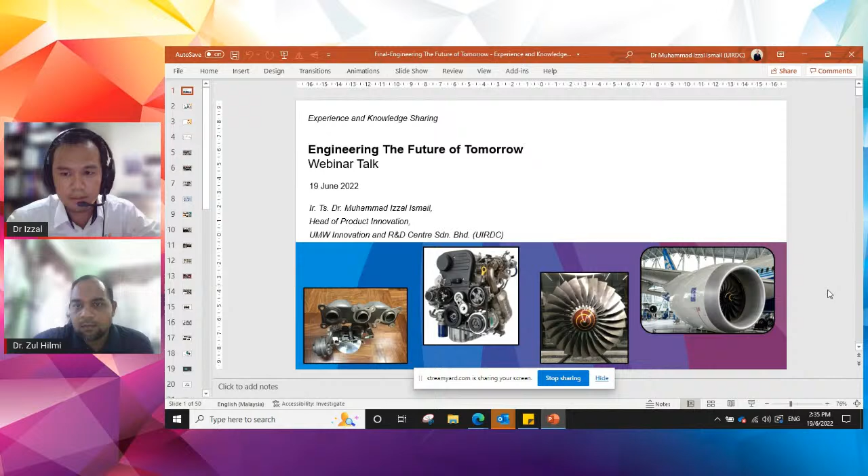So the topic for today is engineering the future of tomorrow. I will share my experience throughout my life journey and share a little bit of my knowledge. I'm currently heading a product innovation team under UIRDC, which is UMW Innovation and R&D Center Sdn Bhd.

This is the content for today. I will explain a little bit about my background, my education and working experience. I think Dr. Zul already mentioned it, but I will repeat it again in a little more detail. Then I'll cover current engineering challenges and how we need to prepare for the future, our tasks and responsibilities, and I will end with the conclusions for today.

So, background, education and working experience. This is my background, my education experience. Saya bermula di Sekolah Kebangsaan Tuanku Fatimah, Bentong, Pahang. I'm orang Bentong, Pahang actually. After that, with the results, I pursued my study di Sekolah Sains Sultan Haji Ahmad Shah, Pekan, Pahang.

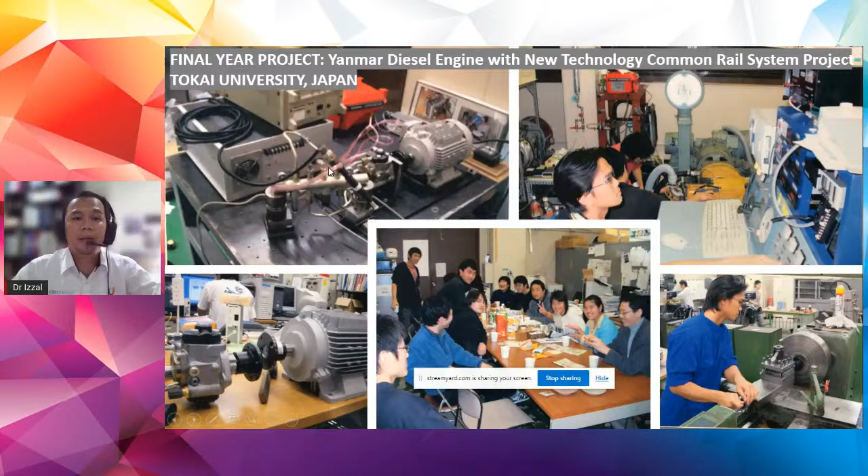I can show you some pictures from my final year project in Japan, where I was involved in setting up an HCCI engine, homogeneous charge compression ignition, which is between gasoline and diesel. This engine can spark or combust spontaneously, sitting between diesel and gasoline engines. That was my final year project, to set up HCCI on the Yanmar diesel engine with a new technology common rail system project with my Japanese team.

You can see there's a high pressure common rail, which needs to be supplied with a high powered motor, and on the right hand side the yellow engine, that's the Yanmar diesel engine. So that's my final year project.

I think this is quite interesting - I needed to analyze and simulate the injector readiness using software called Wavelogger Pro. That was something new for me, and a very interesting experience when I was in Japan.

This is my graduation day, 2007. You can see me with my Japanese team under Professor Chen in the HCCI team and also the fuel cell team, doing research on the HCCI engine and fuel cell engine.

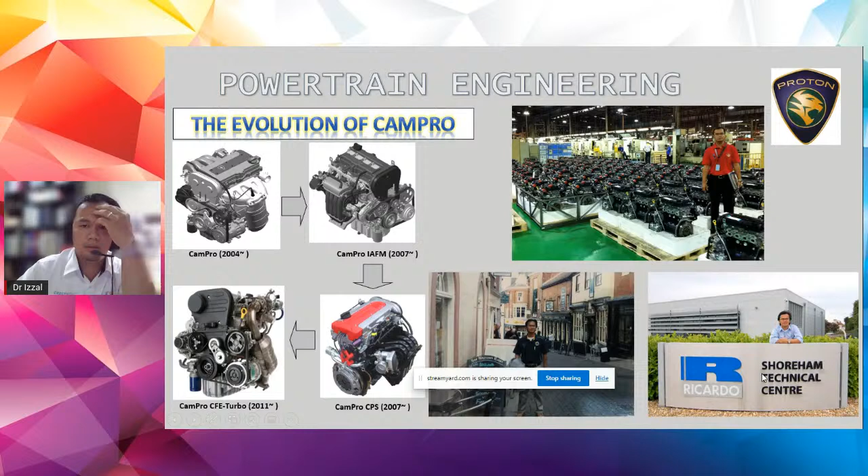This is a summary of what I explained about Campro, launched in 2004 as the first very own engine. It was used on the Proton Gen 2 Campro and also Waja Campro in 2007.

The second one, Campro IAFM, was launched back in 2008, an improvised version of the original Campro - IAFM stands for Intake Air Fuel Module. It's used for Proton Persona till now, and also Saga BLM, baseline model, from 2008 until present. Then the third one is Campro CPS.

Like I mentioned, CPS stands for Cam Profile Switching, and it's used for Proton Waja CPS and also Exora CPS. I think you still remember we have the Exora MPV that uses the CPS engine, and also Gen 2 CPS. I think because the Exora CPS is a little bit underpowered, that's why we came up with the turbo engine, the Campro CFE. The Campro IAFM CPS torque is about 150 Newton meters, while the CFE torque is 205 Newton meters.

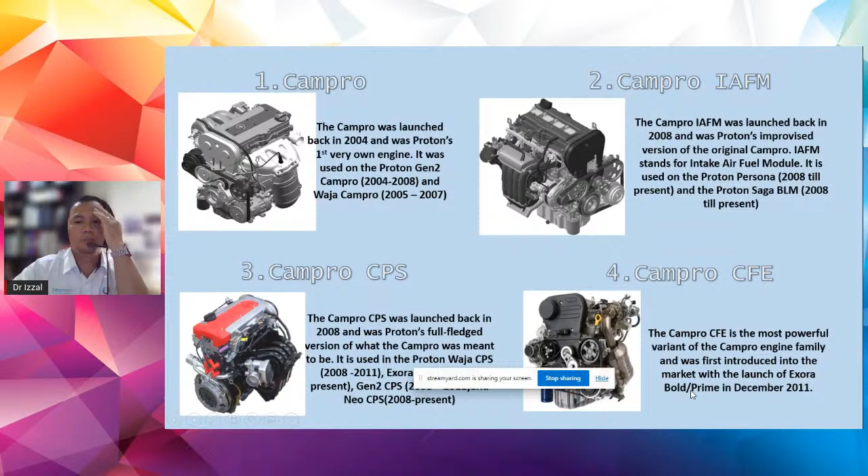And we target the transient at low engine speed. That's why we chose the small turbo, because we focus on the low RPM and target the transient response, rather than choosing the big turbo for the high end, for a more powerful engine. For Proton, we chose the small turbo focused on low RPM to get a better transient response at low engine speed. This Campro CFE was first introduced into the market with the launch of the Exora Bold Prime in December 2011.

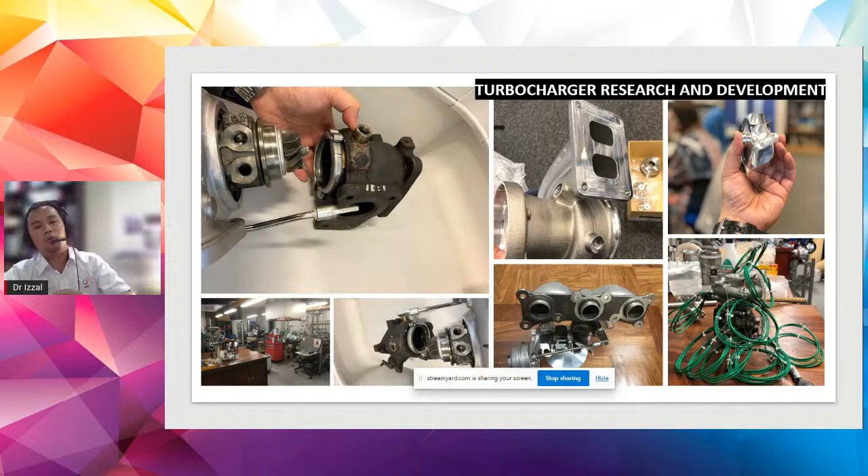That's a collaboration with Mitsubishi, MHI Japan, where we needed to measure the temperature at the turbine inlet, turbine outlet, compressor inlet and compressor outlet at the cartridge. You can see multiple thermocouples in that picture, part of the heat transfer effect on the turbocharger project with MHI. At the bottom center is a 3-cylinder engine cross section, which we need to understand what components are inside the turbo.

Just to share with you, in 2018, when Tun Mahathir was our Prime Minister, he visited us at the Turbo Lab in Imperial College London to seek advice on potential EV business readiness in Malaysia. Professor Ricardo asked me to lead the Turbo team to welcome Tun Mahathir.

It was a very good discussion between our Prime Minister and Professor Ricardo. My professor said the readiness of EV is more about infrastructure, because if we want full EV, we need charging stations from Johor to Perlis, for instance. So we need ready infrastructure before we embark on EVs in Malaysia. Otherwise, we can only use EVs in controlled areas, like Putrajaya, in very short distance areas. On top of that, we also explained the readiness of using hybrid vehicles at this moment.

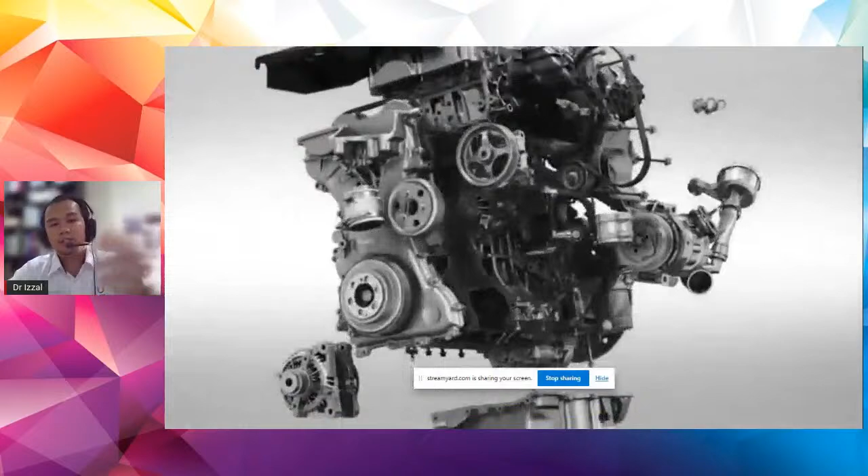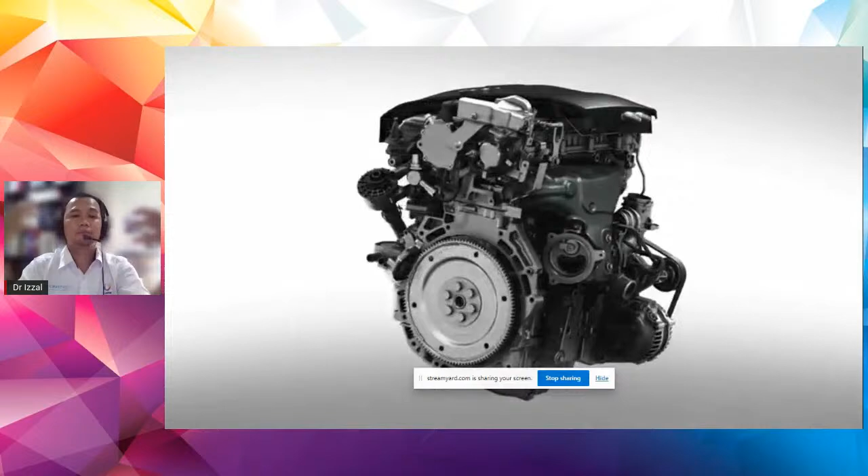There are thousands of components in an engine. We can see there is a crankshaft, cylinder block, camshaft, piston pin, piston ring, the front end accessory drive, all the filters, the aircon compressor. There are a lot of components in an engine, and as automotive engineers, we have to make sure that all the components are designed and analyzed so they all fit together. To make an engine fitted into a vehicle from scratch, I would say it takes about 24 months, 2 years, from A to Z to design and produce an engine.

You start with engine benchmarking. For instance, if you want to do a CFE turbo engine, we need to decide what kind of engine we would like to compare. Are we focusing on low end torque or on high end power? Once we have that selection, we need to set the potential design strategy for that engine. So we do benchmarking, and then our design engineers can start designing all the components. There is a design engineer for the crankshaft, for the cylinder head, for the piston pin, piston, connecting rod, and so forth. Once the design is completed, it needs to go together with design analysis.

We have 1D simulation by calculation. We also have 3D simulation, where we need to mesh and do FEA, finite element analysis, to see the fatigue factor, the strength and stress factors, and fatigue areas in that particular design. Then there are iterations between design and analysis to make sure the design fulfills the engine team requirements. In Proton, and I think in other OEMs, they also have the SSTS, sub-system technical specification, which identifies the target performance of the engine and also of the vehicle.

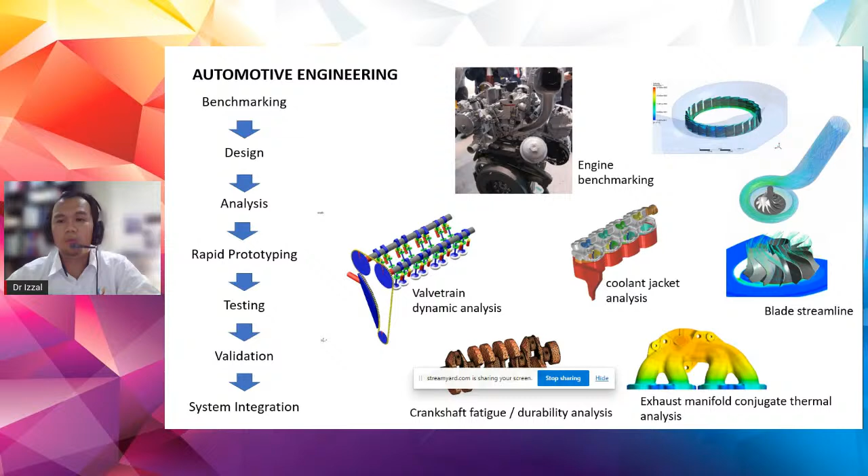So if you can see the graph that I put here, the CO2 requirement, the emission requirement, is getting more stringent over the years, and we're expecting in 2025 or 2021 the CO2 emission will reduce to even less than 100 gram per kilometer. Because we are using gasoline, we are using diesel, we have the hydrocarbon in there, so it will pollute emission to the atmosphere. That counts in the CO2 numbers.

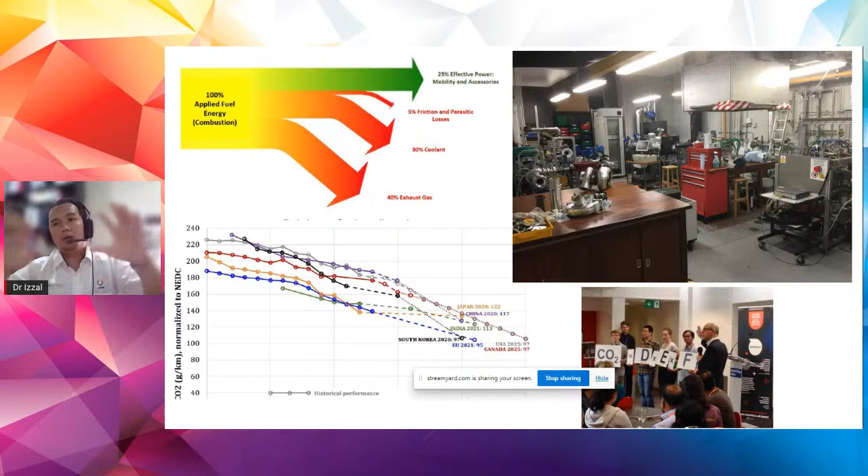So that's why we are working intensively on designing an engine, or we change the ICE engine, internal combustion engine, to something else that reduces the CO2 emission, like a hybrid, or we downsize the engine, like we use a turbocharger, which is we have the same performance but less surface area, thus reducing the CO2 emission value. And also now we have moved to EV vehicles, with no ICE, using a full electric vehicle to move the car.

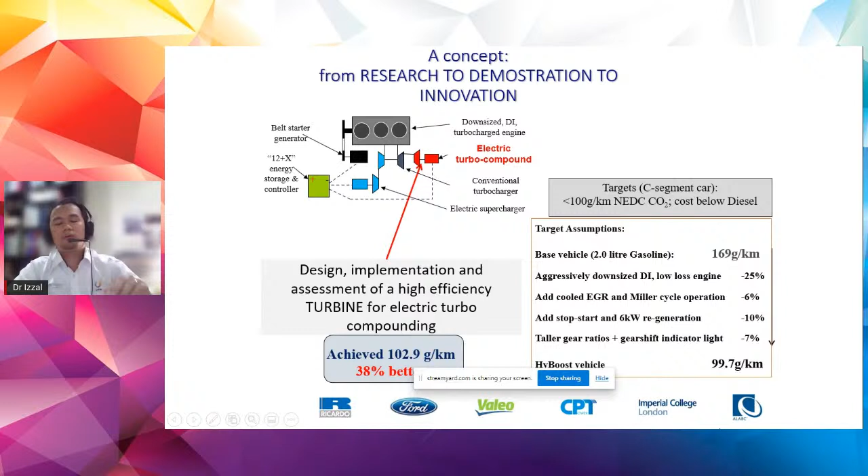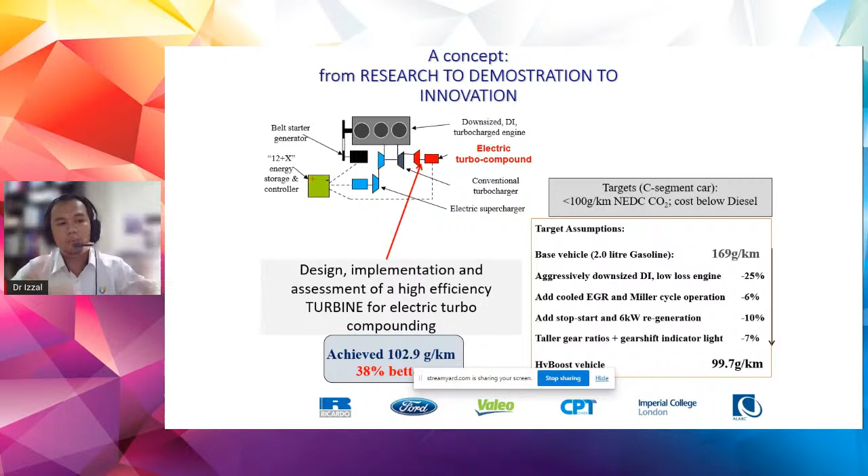So this is some effort, like we use multi-boosting turbo in an engine. We downsize the engine. I think this is quite old, I think it's 2013, 2014 when I was at Imperial last time. The turbine for electric compounding, with this architecture, this engine managed to get 100 gram per kilometer with 38 better fuel consumption. So this is some effort to make sure that we achieve that CO2 emission with a downsized, very small engine with powerful performance.

So I think this is like a combination over the years, maybe until the 2025 trend, people tend more to electrification. But like I said, there is some evolution of the engine, which comes with the common engine, the standard engine, which is the naturally aspirated engine, and then they downsize the engine. The naturally aspirated comes with the PFI, port fuel injection strategy, or gasoline direct injection strategy, using petrol, using diesel,

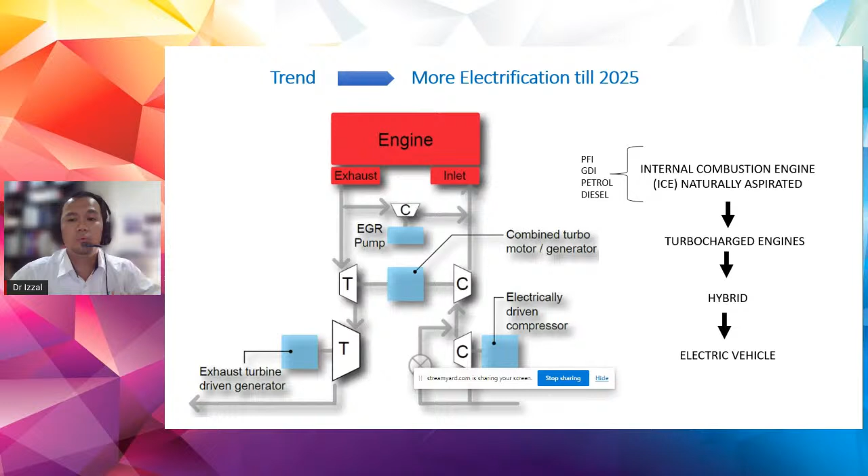and then to reduce the surface area of the engine, it downsizes the engine and puts in the turbo. And then it goes to the hybrid, which is a combination between the battery and ICE engine, and then it goes to the full electric vehicle. So that is the trend over the years.

Okay, there's some explanation on the automotive engineering. So when I work with UMW, my responsibility, my task is getting broad, because when UMW appointed me, they want UMW to have UMW's own product. So before that, I would like to share with you the video.

Actually, UMW now is already 105 years old. So I would like to share with you from automotive to aerospace, because if you talk to anyone else, cakap je UMW, all in mind 90% UMW Toyota. Actually, we have 4 divisions. We have automotive, equipment, M&E, and aerospace. So Toyota falls under automotive, but we have another 3 divisions. So I would like to share with you this video, and please enjoy, listen to this video, what UMW is all about.

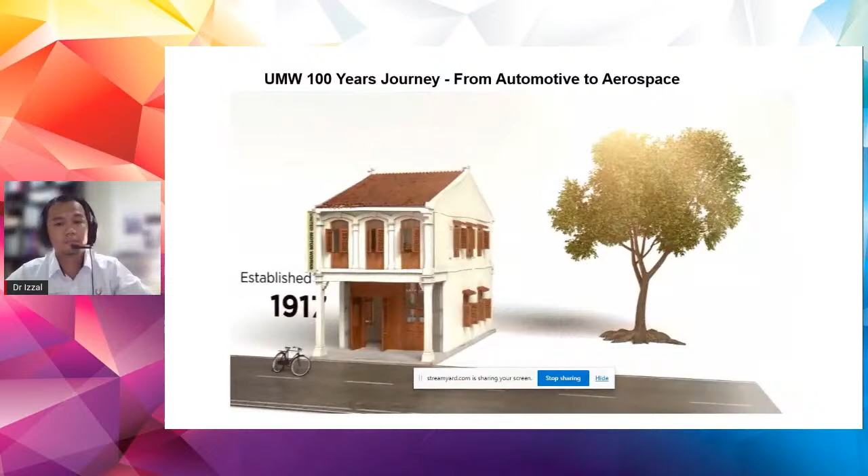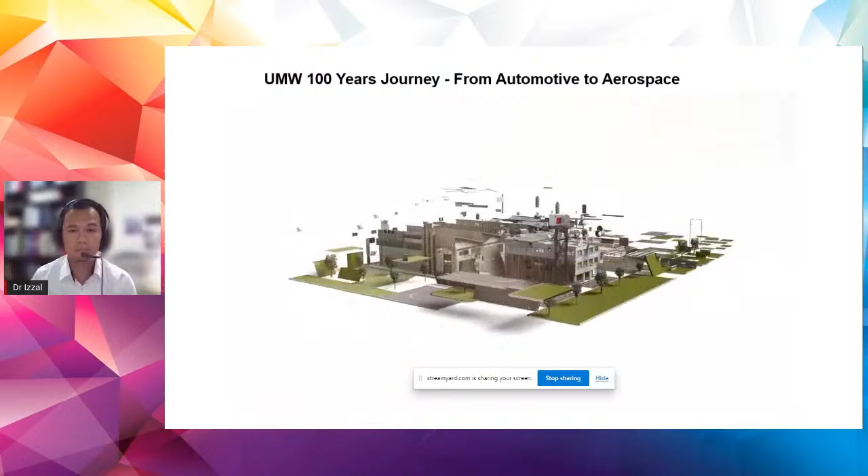It all started 100 years ago in a humble spare parts shop. Our founder, Chua Yew Cheng, was fascinated with engines, which sparked ideas that would revolutionize different industries. We wondered if getting good at one thing could make us good at another. What if building powerful, heavy equipment could help us make reliable cars?

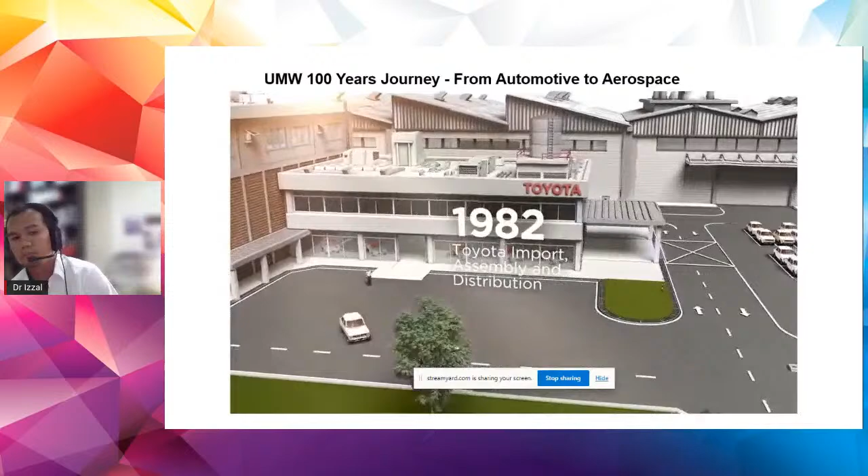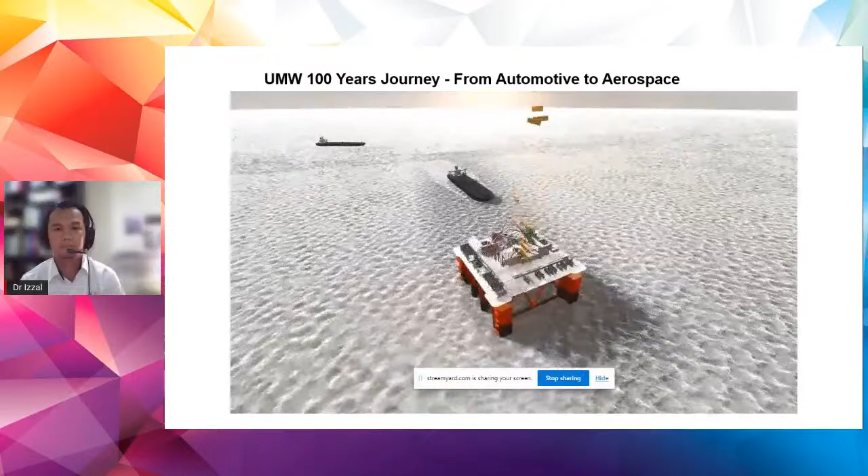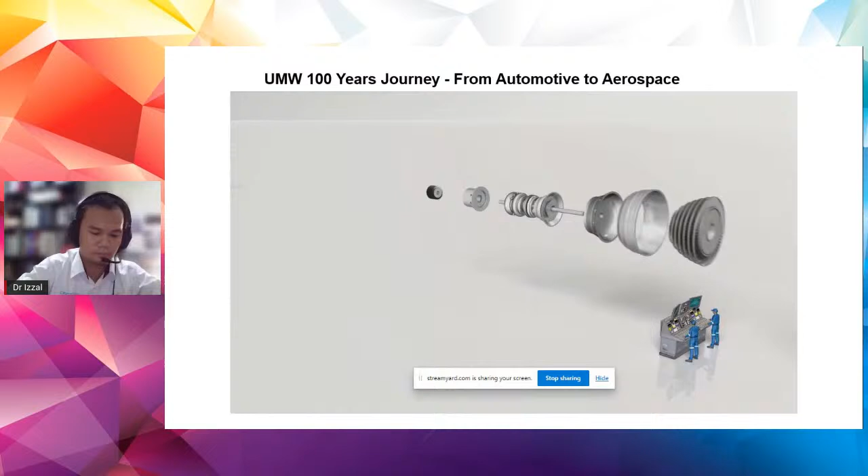What if manufacturing led to venture into oil and gas? Or venture into aeroplane fan cases? That led to investing in technology and IT services. Which then paved the path for building a high-value manufacturing park. We've all made it possible, and as we move on to the next 100 years, we'll never stop breaking boundaries and going beyond what we set out to achieve.

Okay, that's the video. So basically UMW is a GLC company, which is more than 60% under PNB, and then 20% is under KWSP and also KWAP, Kumpulan Wang Persaraan. We operate in 8 countries, 70 companies under UMW, and 16,000 employees. And it started in 1917, like the video mentioned, with a bicycle repair shop, and evolved until we have a partnership with Rolls-Royce to make a fan case.

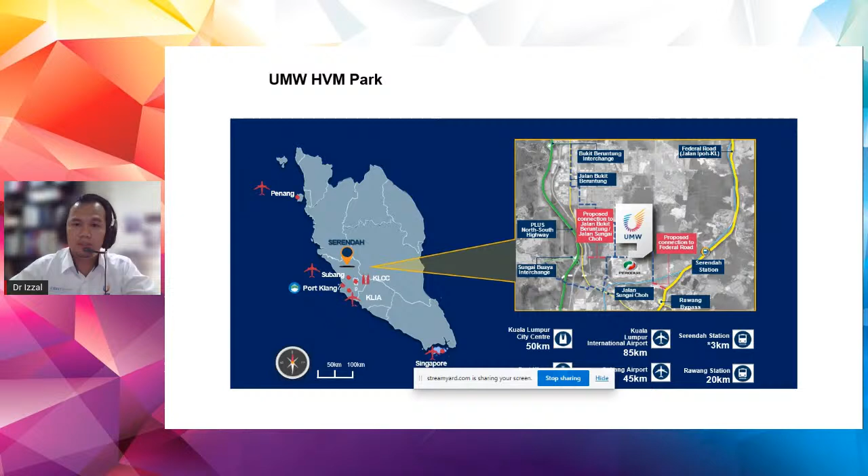UIRDC is located at UMW High Value Manufacturing, HVM Park in Serendah, just opposite Perodua. In our lab, we have an IR 4.0 lab, battery lab, biolubricant lab, and also membrane lab. So you can see our building, UIRDC, and inside is our lab at this moment. And we might expand our lab based on future projects, inshallah. Okay, this is the map, UMW HVM Park. You can see UMW is just opposite Perodua.

And I just want to share with you, we apply an open innovation approach. Top management instructed our team to make sure we have a UMW product. So what is our potential product? We need to exchange information and collaborate on ideas with all parties. That's why we apply the open innovation approach, so that we can diversify ideas and ensure the product can successfully enter the market based on needs and so forth.

So we always collaborate with government agencies. We meet MIDA, we meet MGTC, Malaysian Green Technology Corporation. MIDA asks what the needs are, what the demand is right now, and we also meet all the industry players. We do some benchmarking. What is a good product? We ask subject matter experts, based on their experience, what the pain point for customers is, and we also engage with universities. Since last year, I visited a lot of universities, including UTM, UiTM, UPM, UMP, to see what good prototypes can be commercialized.

Because at university, most do prototypes based on the expertise of the department, and maybe don't tend to commercialize because of investment and several factors. So maybe we can assess. My team always goes to the universities and assesses whether a product has potential to go to the market, and from there we can further investigate and discuss. And if it's potential, we'll bring the proposal to top management, and we get the funding from them to commercialize that product. That's for example.

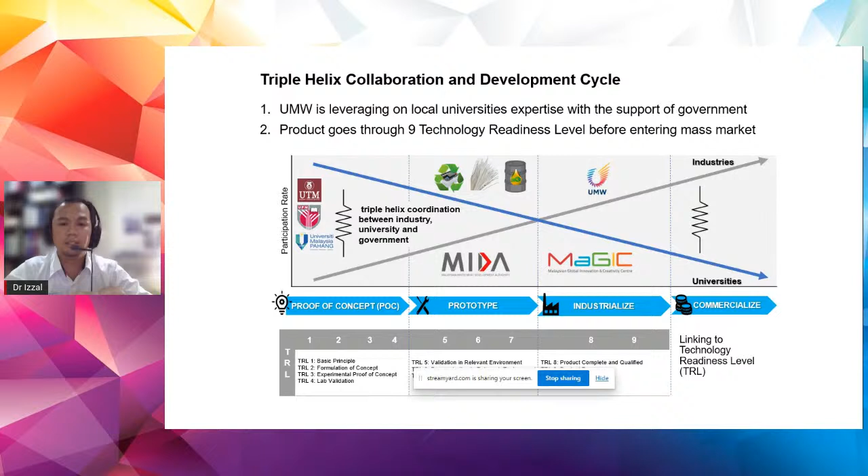Technical, financial, commercial. Is it boleh jual ke tak? Is there demand or not? Is there a need from customers or not? And L, legal. The product needs to be legal lah, not illegal. So we need to get certification standards from a certified body. So the 4 points we need to assess before we choose the prototype to collaborate on together with UMW is TFCL. Please remember: technical, financial, commercial, and legal. So this is some explanation on this slide.

And then I want to share with you a little bit on our current green innovation projects. We choose based on 3 main elements: engineering elements, innovation elements, and also sustainability elements. We need to have a product that can be sustained for more than 10 or 20 years, so before it expires, we have already identified what we need to change it with. So the product also needs to be sustainable. Currently we have 3 projects: the battery management project at the battery lab, the membrane project at the membrane lab, and the biolubricant project at the biolub lab. So I will explain what we at UMW are doing right now.

On top of that, we also have one IR 4.0 lab to support our innovation projects. We have 3D printers, both low end and high end. We also have a laser cutter, and we can do prototyping because at this lab we also get several interns from university, and we have SolidWorks software. You can design several parts and then convert to 3D printer. We have the prototype, and there is some design and analysis activity happening in the IR 4.0 lab.

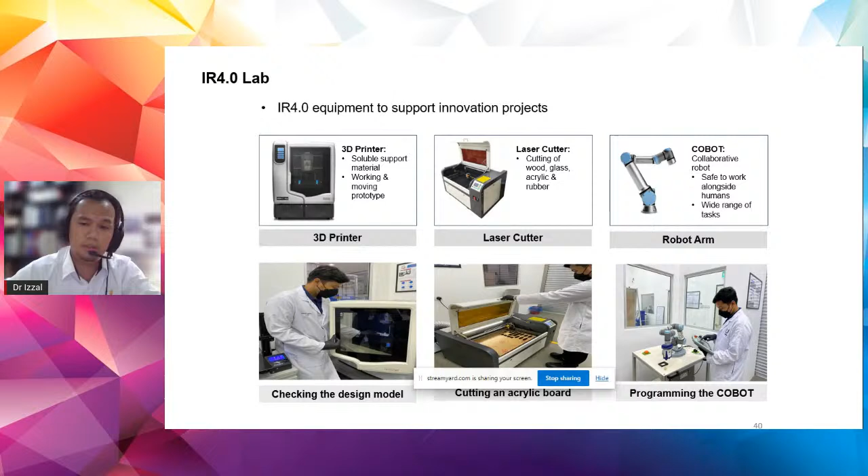We have a laser cutter to cut acrylic or foam, leather and so forth to support our innovation projects. We also have the cobot, just to mention that UMW Industry is also a distributor of UR, Universal Robot. So if you're more interested in the UR cobot, you can contact UMW Industry.

So this is the battery lab. We do battery research and testing. We understand the battery terminology, but for this stage, we are focusing on the lead acid battery to extend its life. But we do have our own roadmap - currently we focus on lead acid battery because the demand is there, and we will focus on nickel cadmium, lithium ion, and solid state battery in the next 5 years.

So for lead acid battery, we tend to extend the life of the battery because 80% of the lead acid batteries on the road, in our cars, the battery fails due to sulfation. We have an anode and cathode, plumbum plus PbO2 (lead oxide), plus we have an electrolyte H2SO4, sulfuric acid.

When discharging, it will go to PbSO4 (lead sulfate) and H2O water, and it becomes an irreversible cycle as we keep discharging. Over time the sulfuric acid will form into lead sulfate, the white color that sticks to the battery, which cannot go back to sulfuric acid. The creation of lead sulfate will reduce battery performance because it will increase the internal resistance of the battery, sticking to the battery plates.

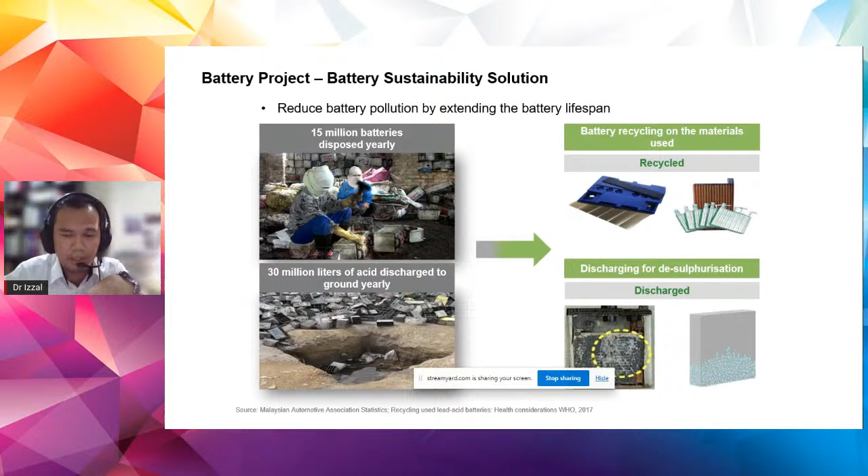Because if we apply current on that battery, but if the current is too high, it will crack the plate. So there is a cycle, there is our secret recipe to make sure that the sulfur can be desulfurized in an efficient way without damaging the plate in the battery.

Okay, the next project is the biolubricant lab. We do lubricant research because some of you may already know that we have Lubetech Sdn Bhd, selling Pennzoil and Gran lubricant, but all of them are mineral based, which is toxic.

In our green and sustainable environment, we are using plant based formulation which is not toxic, biodegradable and non-toxic. If that lubricant falls to the ground, it will degrade in 28 days, and if it gets into a river, the aquatic life won't die.

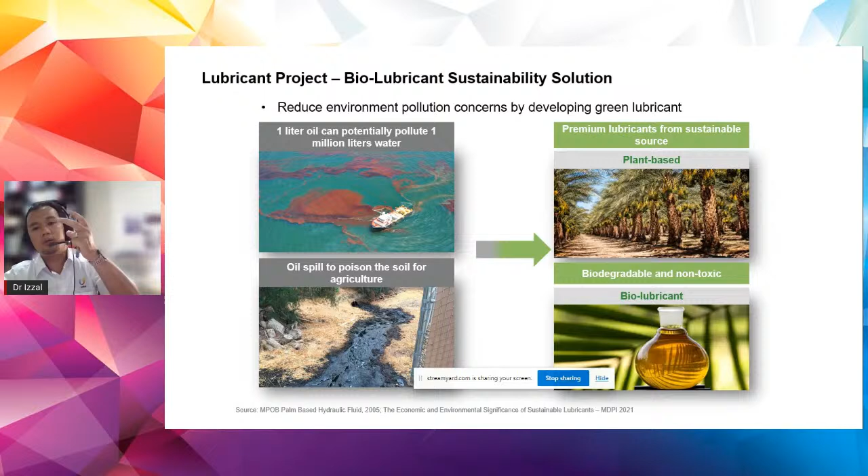Next on our roadmap is food grade grease. That's why our product, which is biodegradable and non-toxic, is bio-lubricant.

And last but not least, we have a membrane lab. Most UTM people already know UTM has AMTEC, the Advanced Membrane Technology Research Center. We already collaborate with AMTEC to commercialize the product.

So we do have the bioreactor system. This is a proof of concept. We also have incubation and spectrophotometer to analyze the chemical composition of samples and so forth.

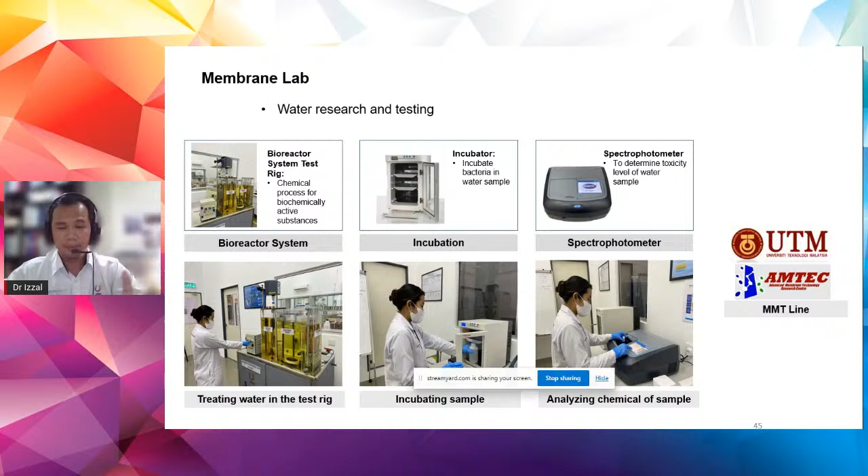Water filtration is also in demand because water demand is increasing year by year due to population growth and industries requiring more water. So for this membrane lab, we focus on the water reclamation plant.

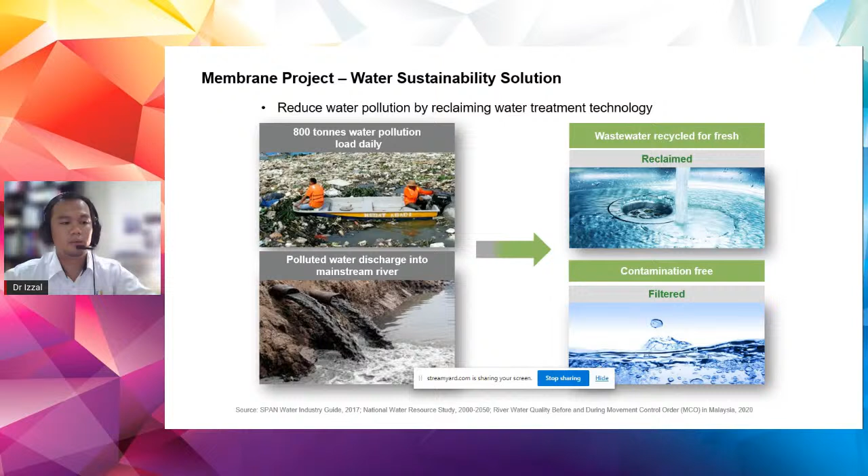We try to grow our team. We have water solution engineering, we have design water experts. We try to develop our team to make sure we are involved in these water engineering projects.

Okay, conclusion for today. It's 3:30 already. Basically, I just want to advise all of you, maybe the students, that we just need to prepare ourselves for the future.

Knowledge and experience help you grow. Please get involved in anything you have in university related to communication skills, networking, and engineering things - all of that will be applied once you work in industry, for instance.

And number 2, university provides you an educational platform to grow, as well as leadership skills, communication skills, and networking. Participate in clubs and societies. Make yourself active so that we can become

the future pillars of the nation. So prepare yourself. Okay, number 3 is

understand the needs of the future. To do something, we need to identify what the needs are. Is there a need? Is there a demand in the future? If there is, try to be something that adds value for the future.

And be passionate towards your work. Make sure that we complement and become an asset to the nation, not a liability to the nation. Okay, that's all from me.